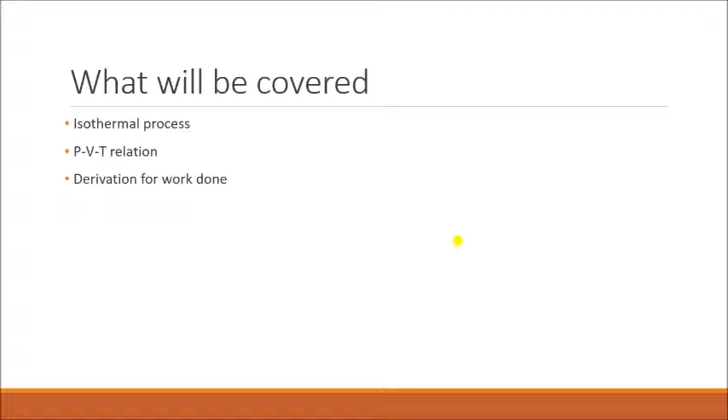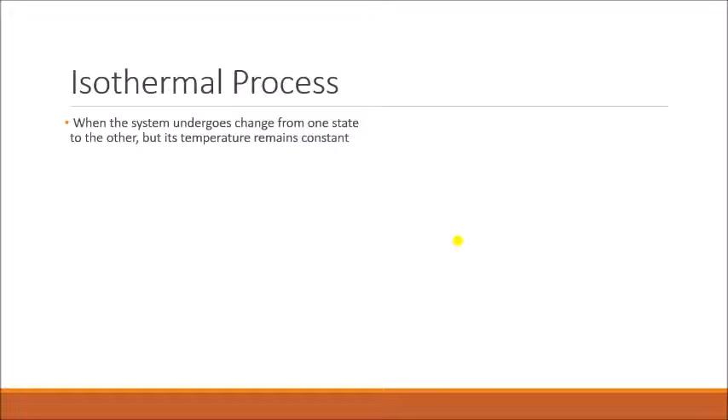Okay, so let's go through isothermal process. So what do you mean by isothermal process? This isothermal process can also be called as constant temperature process. During this process, the system changes its state from one state to another, that is from initial state to final state. But during this change, the temperature of that system remains constant. So the temperature of that gas remains constant. So how that happens, we'll see it here.

So this process we call constant temperature process. During this process the heat is supplied in such a way that the temperature of the gas remains constant during the expansion. The heat is added continuously and gradually, such that the temperature of the system remains constant during the expansion. Hence it is called constant temperature process or isothermal process. This is achieved by providing heat to the gas gradually and slowly.

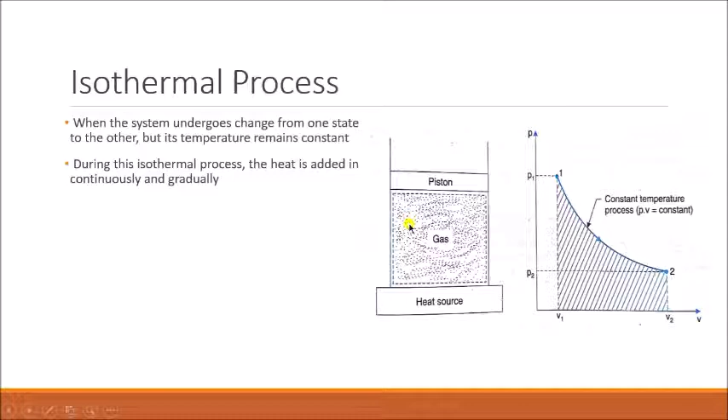When the heat is supplied to the gas, the gas starts expanding. During this expansion, the pressure decreases and the volume increases. The volume of the gas increases, the pressure goes on decreasing, and finally it reaches point 2. Clear? There is a small animation you can see here.

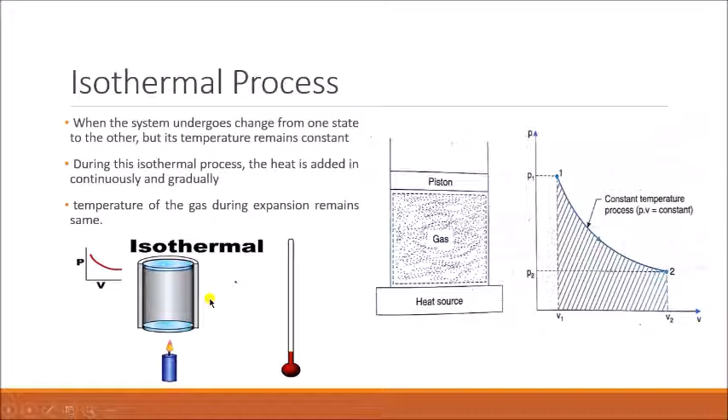You can see in this process the temperature remains constant. This is your thermometer, used to measure the temperature. Now the expansion is taking place, the piston is moving upwards, but the temperature remains the same. Simultaneously the PV diagram is plotted. The curve is coming downwards, meaning the pressure is decreasing and the volume goes on increasing. So during this process the temperature remains constant, only the pressure and volume change.

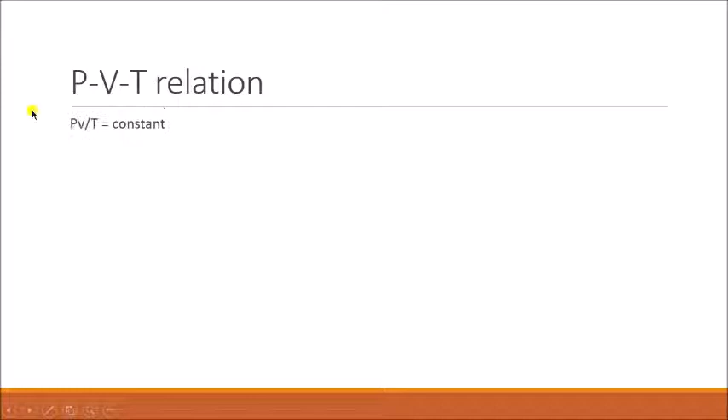Next we will see the pressure, volume and temperature relation during this process. The general equation is given by PV divided by T is equal to constant. In this process the temperature is constant, so this temperature T becomes 1 because it doesn't change. Its value remains the same throughout the process. Hence this equation can be rewritten as PV is equal to constant.

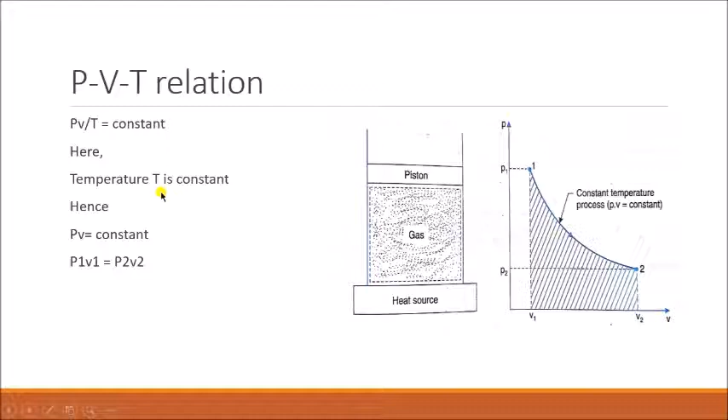It can also be written as P1 V1 is equal to P2 V2, that is pressure and volume at point 1 is equal to pressure and volume at point 2. So this is the PV relation during isothermal process. We don't have T here because T is constant, so it becomes 1. Hence the only variables are pressure and volume.

Okay, so the general equation for work done is given by W is equal to P into dV, that is pressure into change in volume. This dV is nothing but change in volume, that is V2 minus V1. So this is the general equation for work done.

So now what I'll do is I'll integrate this equation using the limits 1 to 2. So how can I write this? That is integration 1 to 2 P into dV. Clear? So now we have seen earlier the relation between pressure and volume, that is PV is equal to P1 V1 is equal to P2 V2.

So this P I can rewrite as what? This PV is equal to P1 V1, so I can write it as P is equal to P1 V1 divided by V. So instead of this P value, I'll substitute this whole value, P1 V1 by V. So here I have written it as P1 V1 divided by V.

So next, this P1 V1 is a constant. At point 1, P1 V1 is same, it doesn't change, so that's why it becomes constant. So I'll take it outside and just integrate dV by V using the limits 1 to 2. V is the only variable here; V can be V1, V2, V3, V4. Only V is variable, P1 V1 is constant. That's why I've taken that outside.

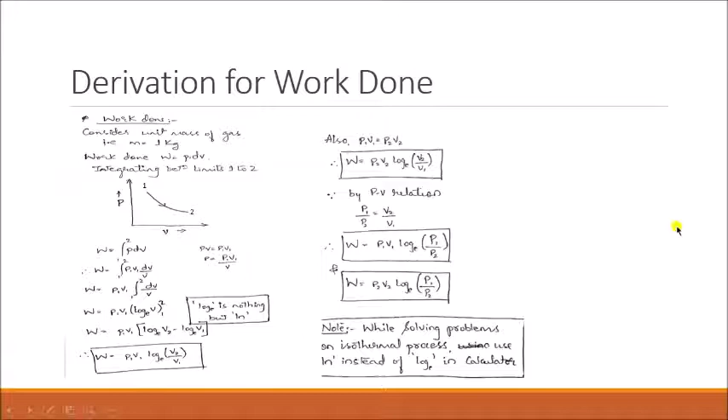So now the important thing you can note here. While solving the problems, while using this log in the calculator, while substituting, you have to use this one, that is ln. You can see here ln they have given. Don't use this log. If you use log during substitution, your whole answer will be wrong. This log is nothing but ln.

So while substituting in the calculator, use P2 V2 ln of P1 by P2 or V2 by V1. Clear, guys? So use ln while substituting or calculating the answer. Don't use this log. Clear? So I think you have understood.